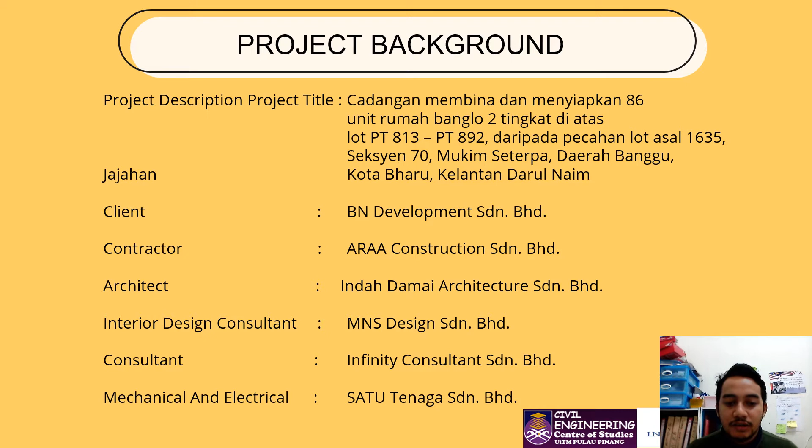The architect is Indah Damai Architecture Sdn Bhd. And for the interior design consultant, MNS Design Sdn Bhd. The consultant is Infinity Consultant Sdn Bhd. And then the mechanical and electrical contractor is from Satu Tenaga Sdn Bhd.

The province of this project is Kota Bharu. The district is Banggu. The local authority is Municipal Council of Kota Bharu, Division Secretariat Kota Bharu. The distance of this project from Bandar Kota Bharu is 10.1 km, and the area of this project is 4.3 hectare.

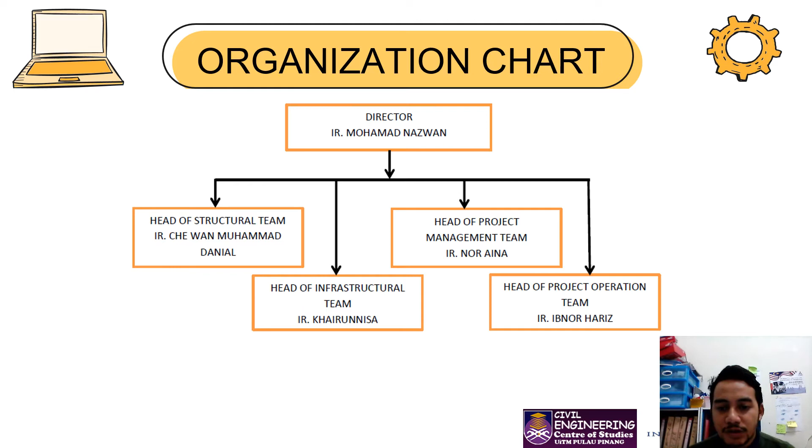For the organization chart, the director of this company is IR Mohamad Nazwan, the head of structure team is IR Che Wan Muhammad Danial, the head of infrastructure team is IR Khairunnisa, the head of the management team is IR Nor Aina, and the head of project operation team is IR Ibnor Hariz.

For the project brief and specification, for the structure, we refer to Eurocode 1, action on structures, part 1-1, general actions, densities, self-weight and imposed loads for buildings, and Eurocode 2, design of concrete structures, part 1-1, general rules and rules for buildings.

For the road and drainage, we refer to ATJ 5/85 Pindaan 2013, manual on pavement design, design of flexible pavement. For the drainage, we refer to the Urban Stormwater Management Manual for Malaysia, MASMA second edition. For the earthwork, we refer to BS 6031, British Standard Code of Practice for Earthworks, and we also refer to MASMA second edition.

For the sewerage, we refer to the National Water Services Commission, SPAN, and the Malaysian Standard MS 1228. And the last one, for the water supply, we refer to the Uniform Technical Guideline, Water Reticulation and Plumbing by SPAN. We also refer to the fire flow requirement, Malaysian JKR Standard.

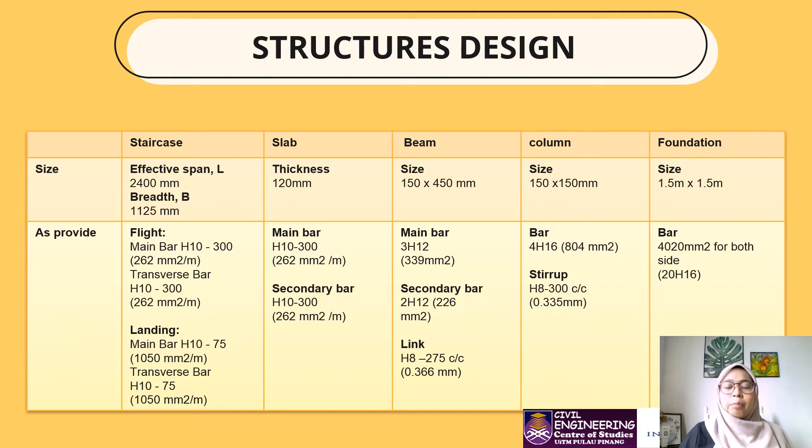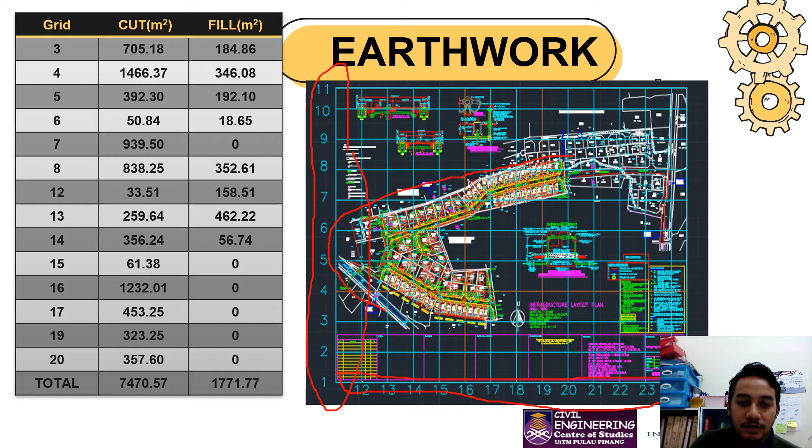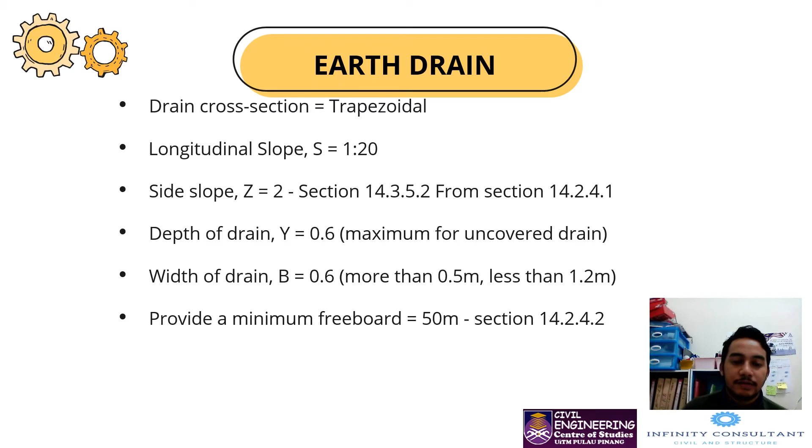Assalamualaikum. My name is Muhammad Nazwan bin Usni. I'm going to present for road and drainage.

Next, for the design criteria, average daily traffic ADT is 172 vehicles. The estimated existing car is 250 vehicles. The total ADT is 422 vehicles. The CBR for this project is 10%. The traffic category is T1. The type of pavement is conventional flexible granular based.

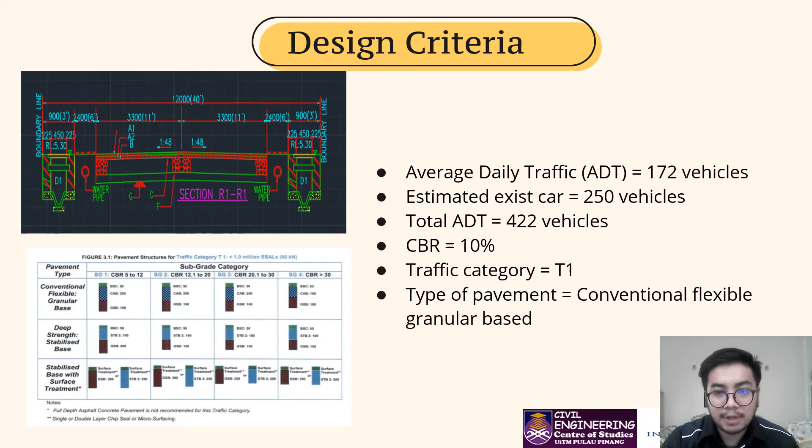Next, the design for drain. The shape of drain is rectangular. The width is 0.5 meter. The depth is 0.3 meter. The velocity of flow is 0.83 meter per second. The discharge for drain is 0.12 meter cube per second.

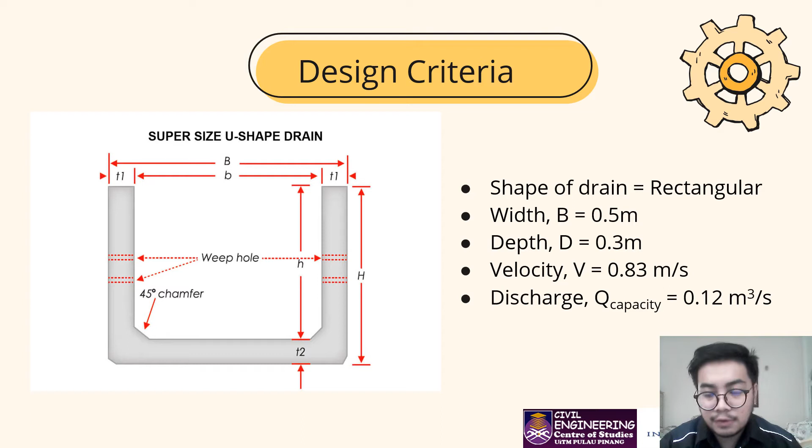Next is for sewerage design. So the design criteria for sewerage, population equivalent PE is 456 PE. Minimum velocity is 0.6 meter per second. The maximum velocity is 4 meter per second. The pipe used in sewerage system is vitrified clay pipe VCP with 225 mm diameter. The area required for STP is 700 meter square. The gradient used is 1 to 200.

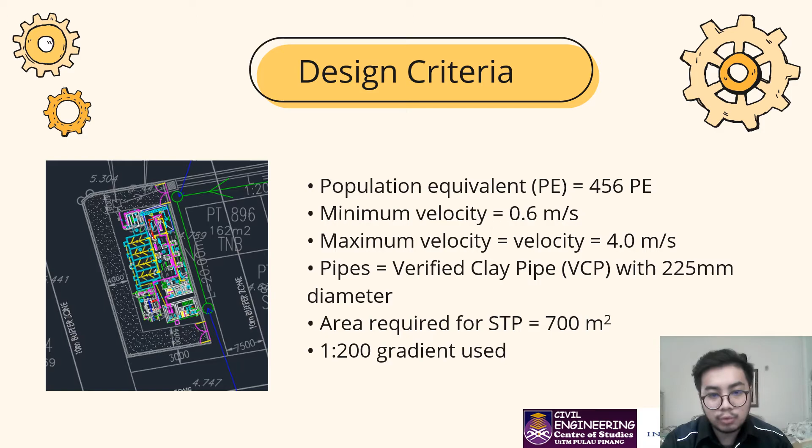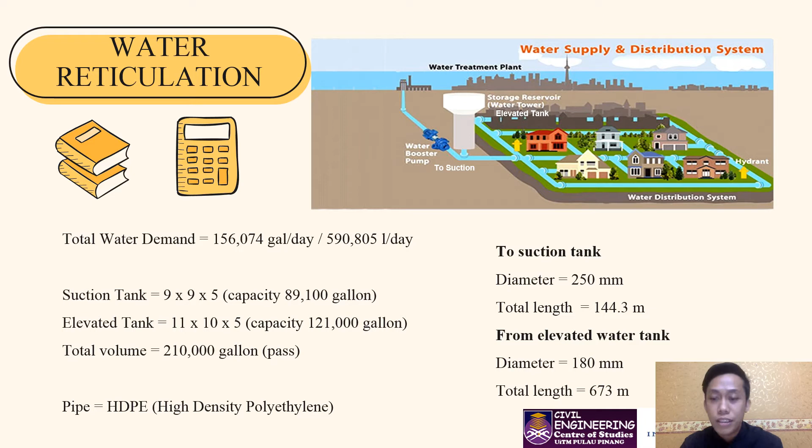For elevated tank, the dimension of the elevated tank is 11 times 10 times 5 with 121,000 gallon. The total volume is 210,000 gallons, and it passed. Our project uses HDPE type of pipes. For this project, we use 250 mm diameter of pipes with total length 144.3 meter to suction tank, and we use 180 mm diameter of the pipe with total length 673 meter from elevated water tank.

So next, the overall costing for this project. So for costing for structure, which consists of substructure excavation, ground floor, upper floor, roof floor, and high tensile rod reinforcement, is RM66,268. For earthwork, which consists of site clearance, excavation work, cut and fill, field density test, wash through, sedimentation pond, and earth drain, is

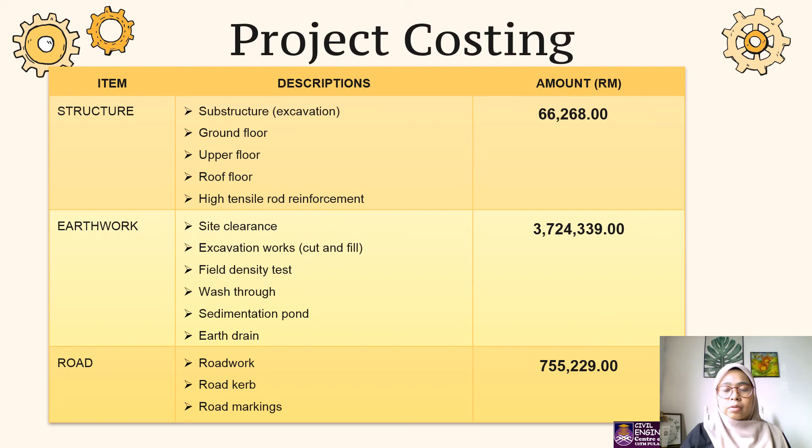RM3,724,339. And for road, which consists of road work, road curb, and road markings, which is RM755,229. So next, costing for drainage, which consists of drainage work, box culvert, sump, connection to mains, and testing, which is RM425,650. For sewerage, we have sewerage treatment plant, excavation work, pipework, manhole, and testing, is

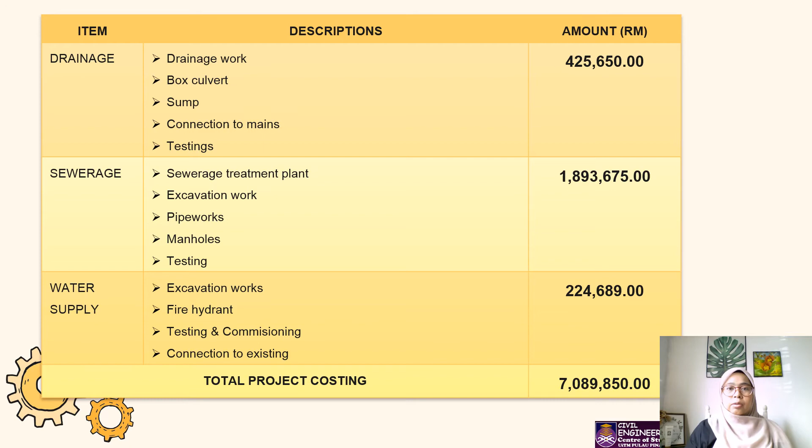RM1,893,675. And last, for water supply, we have excavation works, fire hydrant, testing and commissioning, and connection to existing. Total is RM224,689. So the total project costing of this project is RM7,089,850.

Project scheduling. Total duration for our project is 539 days, equal to 1 year, 6 months. For our project, we use about 110 days for preliminaries. For site preparation, we use 21 days. For earthworks, we apply 55 days. For underground service, we take about 150 days. For building structure, we consume approximately 288 days. For road and drainage, we fill out about 60 days. And finally, for furnitures, we're going to 8 days.

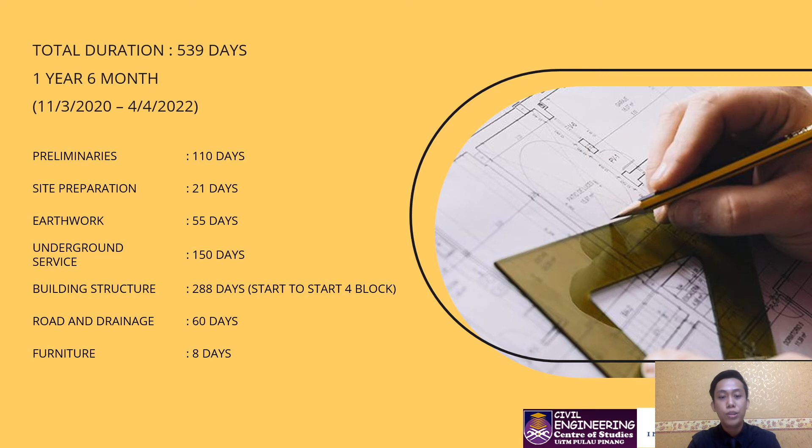Hi, my name is Naraina and I will present about EIA. The objective of this project is to provide more residential area in daerah Banggu and to enhance the community ability in attracting business, at the same time provide basic needs for living, which is house. And the justification for this project is daerah Banggu is suitable for residential area to be developed. Second is the house cost that rises up nowadays makes the community to own a house as property for investment. And the third one is lack of owning land also causes the community to choose a proper developed residential area for living.

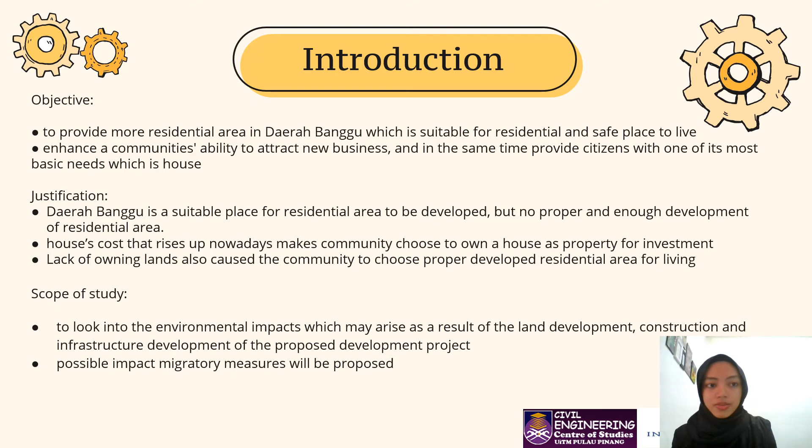So the scope of study for this EIA is to look for the environmental impact that may rise during the construction and then propose possible impact mitigatory measures. This is the project description. The project is located at Kota Bharu, which is District Banggu. The local authority of this project is Municipal Council Kota Bharu, and the project is located 16.1 km from the main bandar Kota Bharu. And as you can see at the map, the proposed site is located near to the Sungai Kemasin, and this residential development will be operated on lot PT813 to PT892.

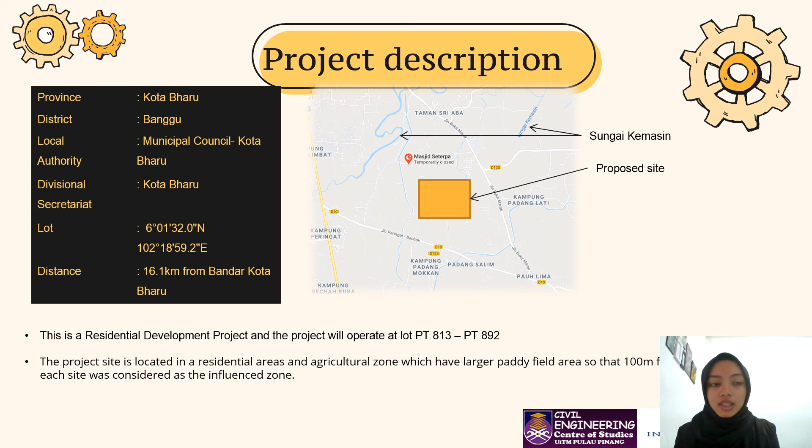Existing environment of the location of site, first is hydrology, which is we have Kemasin River located 200 meters from the proposed project area.

Second one is land use, agriculture and residential zone. And the noise at the project site is mainly sourced from road traffic, informal shops, local village fairs, domestic households, and neighborhood noise. And the air quality is poor, which comes from smoke from the road vehicles.

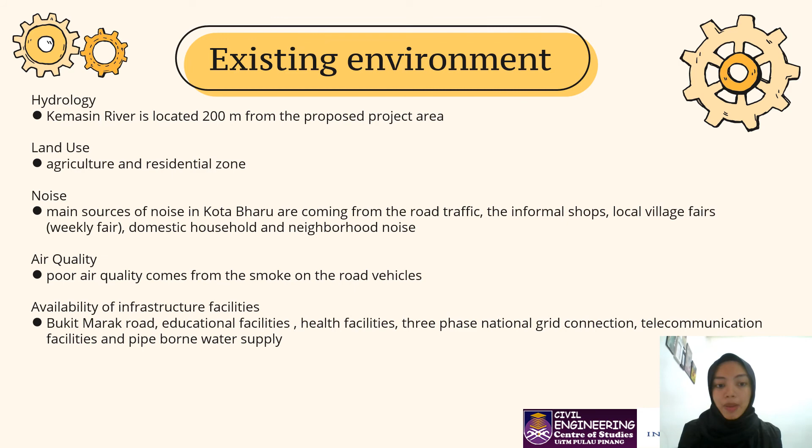And the available infrastructure facilities are Bukit Marak Road, educational facility, health facility, three-phase national grid connection, telecommunication facility, and pipe-borne water supply. This is the project impact and mitigation. The first impact is on solid waste management. So the bin bags to be used for segregation purpose must be in different colors with specific instruction and a brief explanation of the type of waste to be disposed of.

The second one is on noise and vibration. So the mitigation is no construction can take place during the night. The transfer and unloading of goods must take place during the night period, and modern, effective, and new machinery is to be used in order to reduce the air emission and noise pollution. The third one is on dust control. Mitigation is the dusty surface and exposed earth surface should be covered.

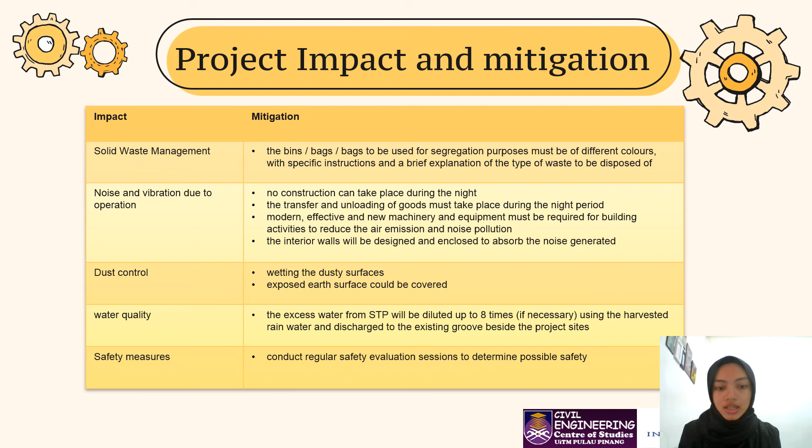And the fourth one is water quality. The excess water from the STP will be diluted 8 times using harvested rainwater and discharged to the existing groove beside the project site. And the last one is safety measure. The mitigation is to conduct regular safety evaluation.

So this is the EMP or Environmental Monitoring Plan. So this monitoring plan is proposed in order to make sure that the suggested mitigation measures are being adopted. First category is noise, where the parameter is decibel value, the sampling location is at the boundaries of the project site, and the frequency of the sampling is 3 months or upon receiving complaints. Second one is air quality, and the parameter is particulate matter. It will be sampled at the boundaries of the project site, and the frequency is 3 months or upon receiving complaints.

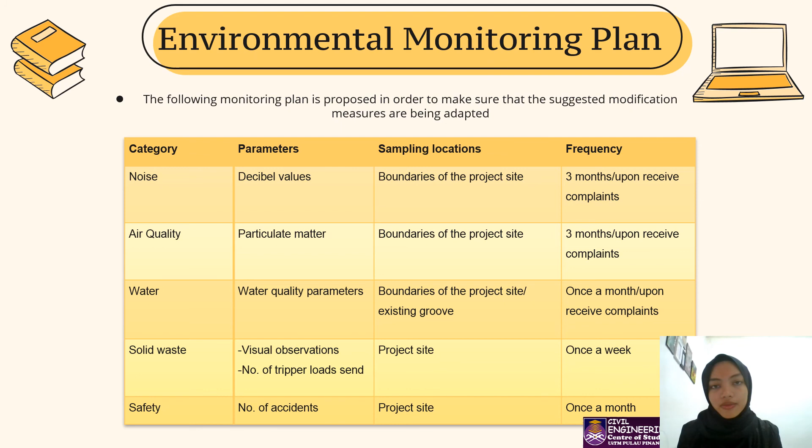The third one is water, and the parameter is water quality parameters. The sampling location is at the boundaries of the project site or existing groove, and the frequency is once a month or upon receiving a complaint. The fourth one is solid waste. The parameter is visual observation and number of tipper loads, the sampling location is at the project site, and frequency is once a week. The last one is safety, where the parameter is number of accidents, the sampling location is the project site, and the frequency is once a month.

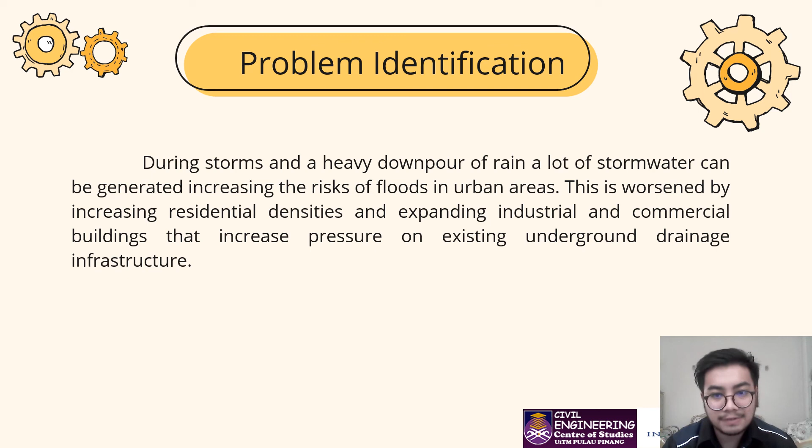Next, the capstone of the project is on-site detention. The problem identification: during storms and heavy downpours of rain, a lot of stormwater can be generated, increasing the risk of floods in urban areas. This is worsened by increasing residential densities and expanding industrial and commercial buildings that increase pressure on existing underground drainage infrastructure. To face the problem, we have come up with a solution by constructing OSD.

Our project area is 4.3 hectares. The impervious area is 90%. The permissible site discharge PSD is 0.271 cubic meters per second. The site storage requirement SSR is 2918.41 cubic meters. The design OSD is 140 meters by 14 meters by 1.5 meters. The volume provided is 2940 cubic meters, which is greater than SSR, which is okay.

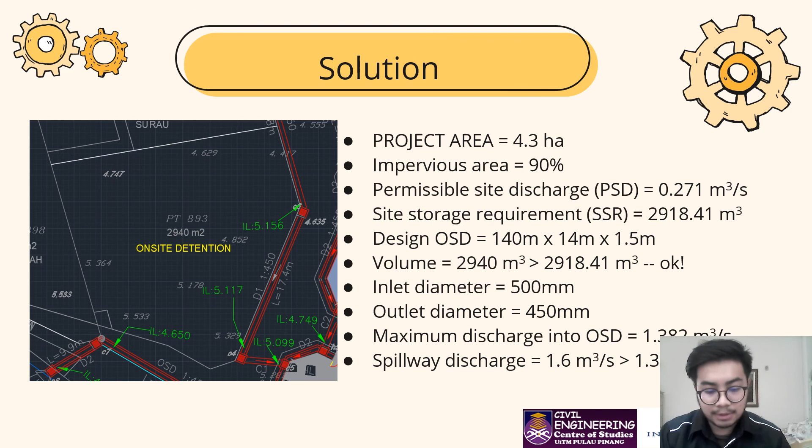Inlet diameter is 500 millimeters. Outlet diameter is 450 millimeters. The maximum discharge into OSD is 1.382 cubic meters per second, and spillway discharge is 1.6 cubic meters per second, which is okay because it is greater than maximum discharge into OSD.

Next is the recommendation for the solution. First, mowing, trimming, and keeping vegetation under control. The second is keeping the pond clear of trash and debris. Next, maintaining mechanical elements in and around the pond. The fourth is to stabilize the slopes. Next, removing excess sediment from the basin, outflow and inflow pipes. The last one is the benefit of maintenance: a low cost and often attractive stormwater management feature.